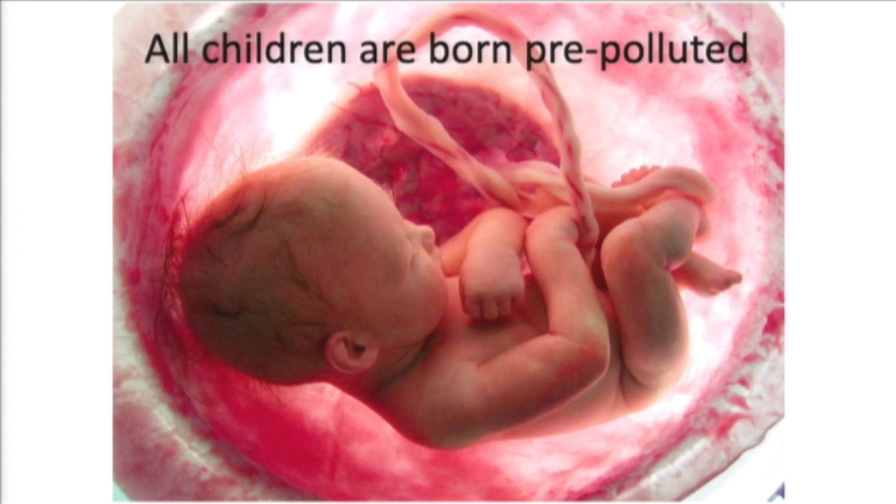And it was about 10 years ago that one of the first studies looking at children at the moment that they're born, looking in the blood found in the umbilical cord and looking at amniotic fluid, found that there are hundreds of chemicals that babies are swimming in the environment before they're born. Hundreds of chemicals.

When I first read that study, I think I was a graduate student or a postdoc, and I was getting ready to give a talk. I was talking about this to my husband, who's not a scientist.

He said to me, how many chemicals should be in the amniotic fluid before a baby's born? If you think about that for a second, it's not actually a question for a scientist. That's a question about our values, about our society. How many chemicals should there be in amniotic fluid?

How many things should we be exposing unborn children to against their consent? Usually, these are things the mother isn't even aware she's been exposed to, and she must have been exposed to them for them to get into the amniotic fluid.

Now, I don't want to confuse this concern about chemicals with a newfound language like chemophobia. This is not a phobia. And if it were a phobia, there's nothing you can do to get away from these chemicals. This is an issue of knowledge, consent, and a question about what these chemicals are actually doing if we're being exposed to them.

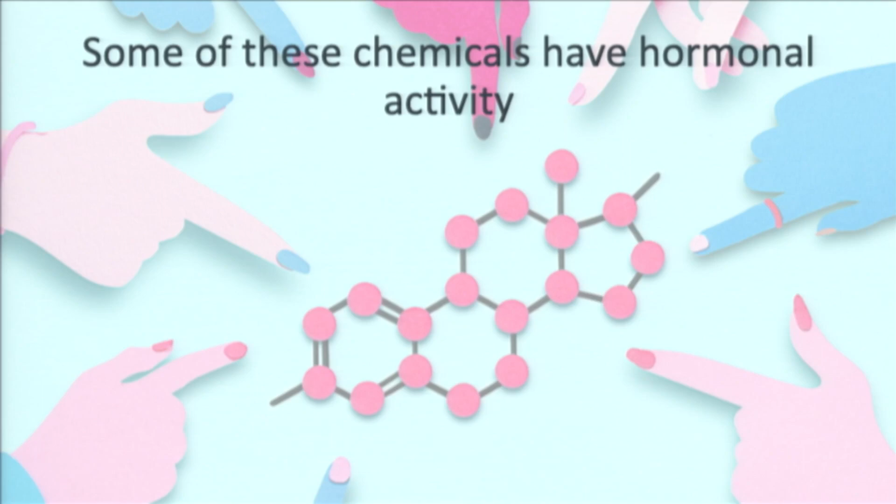I'm trained as an endocrinologist, and my interest in this topic is because some of these chemicals we're exposed to on an everyday basis have hormonal activity. Some mimic the hormones our bodies make naturally. Some block the ability of those hormones to do their job. This is concerning because at every stage of our life, virtually every aspect of the function of our body, our physiology, is coordinated by hormones, from conception until death.

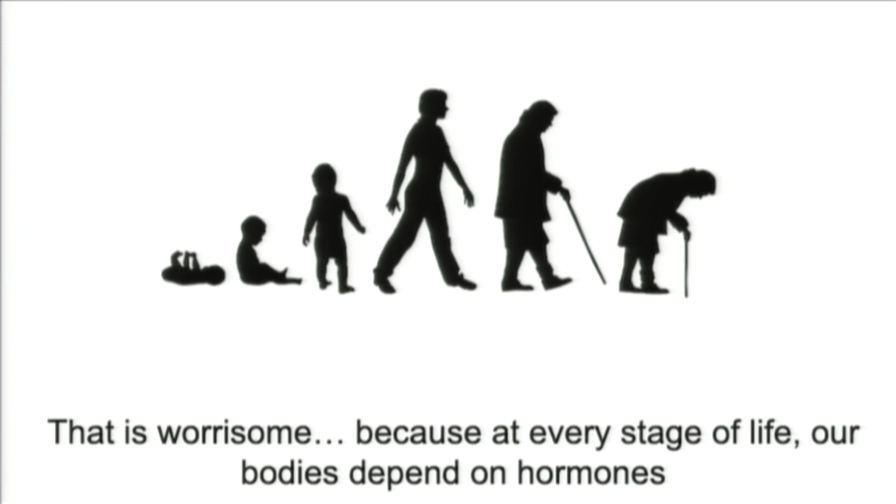The bagel you had for breakfast, its digestion is dependent on hormones. Your ability to keep your body warm sitting in this room is dependent on hormones. Your ability to maintain bone health so you can stand upright is dependent on hormones.

So it's not just the fun stuff that teenagers like to ask me about, because they do ask, but it's virtually everything, including the hormones responsible for brain development, for the development of your organs, for the choices cells make during development about whether they'll become fat or bone.

Our exposures to these chemicals occur in everyday lives, and they're typically low, which is why we don't notice them. It's not like I'm getting into my shower in the morning with a plastic shower curtain and dropping dead because of the plastics in that curtain. We're not talking about the kind of toxicity we should worry about when exposed to things out in the world. We don't want things that cause us to just drop dead.

And some of them, we even take some small satisfaction in. The idea of buying a non-stick pan to cook the perfect egg—who doesn't want that? When you come home from work at the end of the day and sit down on your sofa and it makes that lovely swoosh sound, that's what's releasing flame retardants from the foam of your sofa.

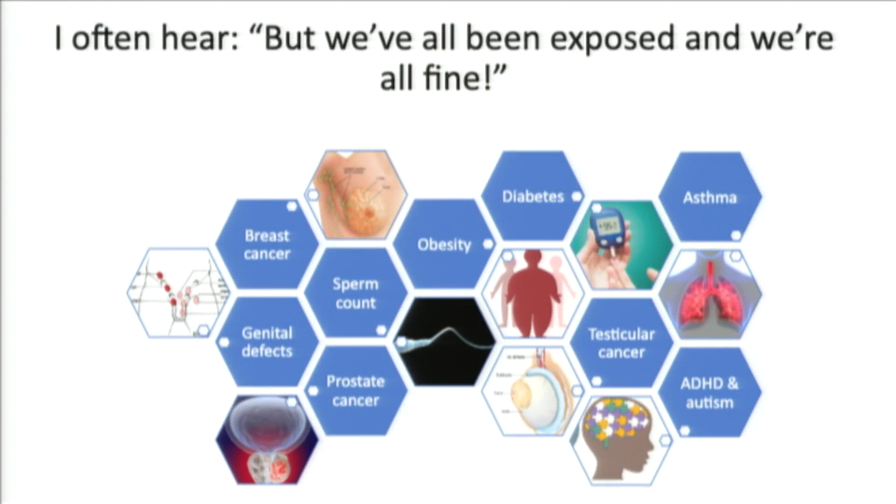So I often hear, we've all been exposed to these things and we're all fine, right? That comes along those lines of, you're just creating hysteria, this is chemophobia, you're trying to make people afraid of things. And what I would tell you is, we are not fine.

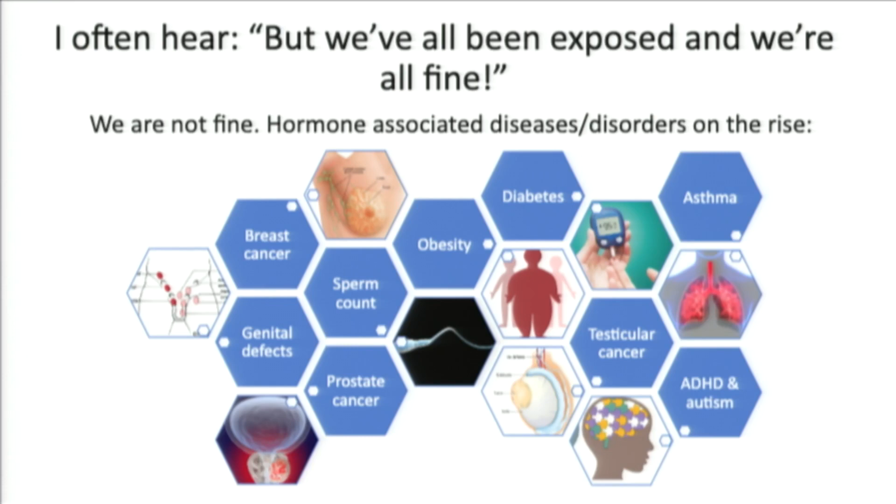As an endocrinologist, we've been studying the secular trends in conditions and diseases that affect human populations, and we see increases in those diseases. Increases in asthma, ADHD, breast cancer, testicular cancer, decline in sperm count, increase in infertility rates, increase not just in type 2 diabetes, which we think of as a lifestyle factor disease, but type 1 diabetes. Increases in obesity, increases in learning disabilities. Do I need to go on?

We are not fine. We are not okay. And the changes in the prevalence or incidence of these diseases have occurred over very short periods of time. When my grandmother was young, the risk of breast cancer was 1 in every 22 women. Today, the risk is 1 in 8. The difference between my grandmother's generation and mine cannot be explained by genetics. There aren't that many genetic changes in a human population over two generations.

So we must start looking more closely at what has happened in the human environment over those two generations. My work, and the work of many of my colleagues, comes from controlled studies in laboratory animals. No one enjoys killing mice and rats, but humans are generally non-compliant patients. If I said to half of you, for the rest of your life you're not allowed to touch anything plastic, not only could you not do that, but you would probably not be willing to try. It's hard to look at these relationships in humans, but that doesn't mean we can't do it.

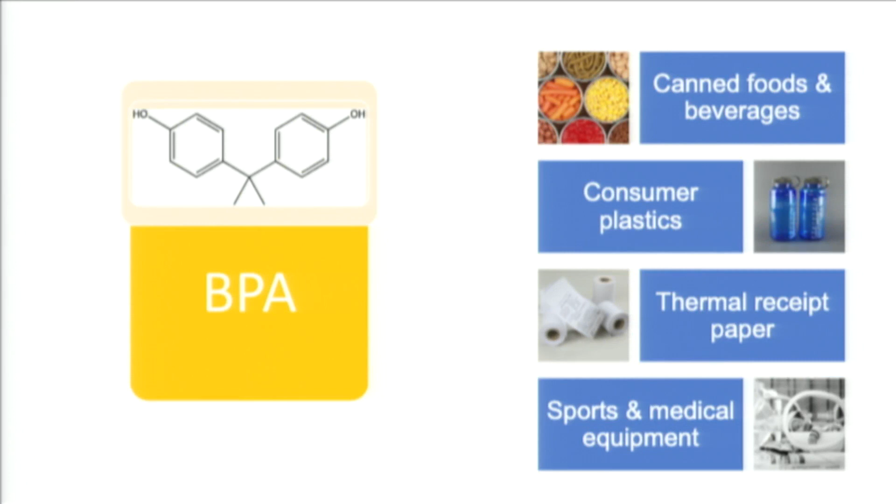The effects of BPA on hormone-related outcomes are extremely well documented, because just as it was pharmaceutically useful as an estrogen, it acts as an estrogen when it enters our body, even though it's entering from leaching plastic products, leaching epoxy resins, and rubbing off thermal papers. We know from animal studies, as well as fairly robust human studies, that exposure to low doses of BPA affects reproduction in males and females, affects development, health and disease of the mammary gland—the breast in women—affects metabolic endpoints including obesity, diabetes, and liver disease in rodents and humans, and affects brain and behavior, including some fairly robust studies done in children measuring what was in the mother's body during gestation and how the child behaves and acts.

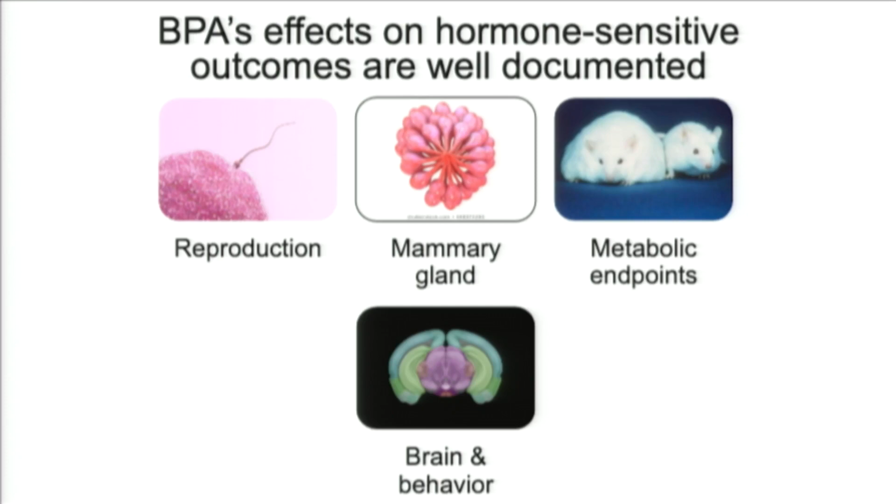Unfortunately, as hinted at with the thermal receipt story, BPA is just the tip of the iceberg. As we've started to phase BPA out of consumer products—and that's not because any regulatory agency has taken action, it's because consumers have said, wait a second, I don't want an estrogen in a baby bottle—instead we're replacing it with other bisphenols.

My lab has been studying bisphenol S, which is a major replacement for BPA. It's in baby bottles, consumer plastics, food can linings, and thermal paper—all the same things. When the first study was published showing that BPS, like BPA, is an estrogen, a reporter called me and said, Laura, I am not a chemist, but wouldn't you think something called bisphenol S would act like something called bisphenol A? And I said, Brian, I am not a chemist, but yes.

When I'm asked to talk about endocrine-disrupting chemicals with the general public, I'm often asked, who is supposed to protect us from these chemicals? Isn't it someone's job to say that's an endocrine disruptor? It affects hormones in babies. It will affect the development of babies because that's what hormones do. So let's not expose children or babies or pregnant women or the elderly or you to these chemicals.

In the US, chemicals are regulated by the EPA, which regulates pesticides and industrial chemicals, including pretty much everything that goes into building materials. It regulates what's found in the air and water as a pollutant. The FDA regulates cosmetics, personal care products, pharmaceuticals, and food packaging.

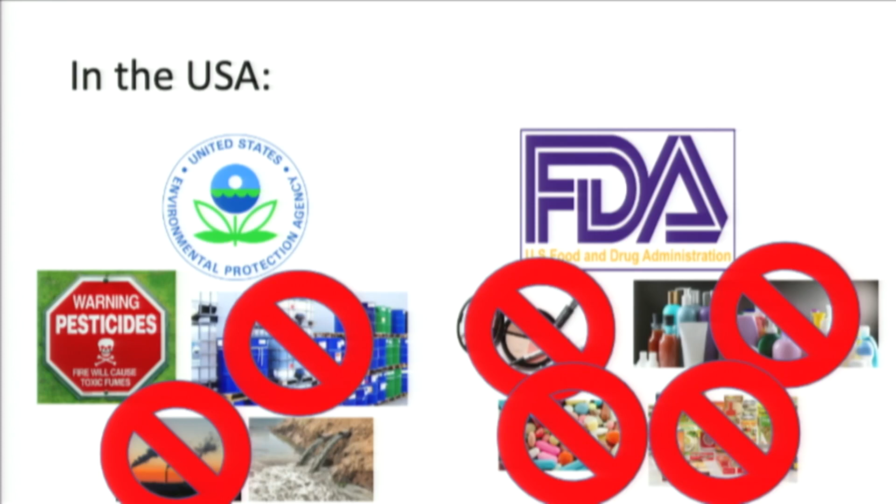Currently, we only have legal statutes related to endocrine disruptors for pesticides. The statute requires that pesticides be evaluated only if they have estrogenic activity, so forget about all the other hormones. To date, the EPA has evaluated with any level of detail only 52 pesticides for endocrine disrupting properties.

There are thousands. I just want to make sure we understand the real cost, because the EPA, for all its strengths and weaknesses, requires in its regulatory statute that it consider the economic cost of any regulation passed. This is why even a product as dangerous as asbestos took almost a full decade to regulate in the United States, because the asbestos industry could argue that it cost them something to be regulated.

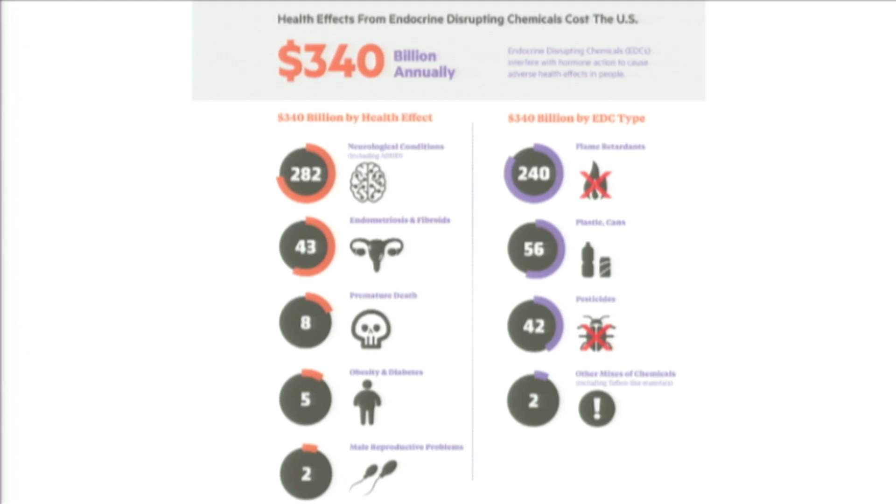There is a cost to not regulating as well, and that is not usually evaluated by decision makers or regulators. Instead, it's starting to be evaluated by academics like my colleagues at NYU, who looked at just a handful of endocrine disrupting chemicals and just a handful of diseases, and calculated costs to the American public annually of over $300 billion.

So what do we do when regulations fail to protect public health? What can you do? I think the first thing we need to do is acknowledge a need for a paradigm shift. In a paradigm shift, the first thing that happens is you deny there's a problem. The second thing you do is say, okay, it's a problem, but it's extremely rare—like, maybe BPA is bad, but otherwise you're just making a big deal about other things.

The third thing you do is suggest an inability to do anything about the problem. You say, okay, it might be a widespread problem, but it would cost us way too much to do something about this, so we can't.

The next thing you do is accept that there's a problem, and we're not there yet. We just heard about how people don't accept that there's a climate crisis right now. In the world that I work in, there's a large lack of acceptance that there's a problem, which means we can't get to the last step, the most important step.

Which is to accept that there's a problem and enforce a change. The second thing we need to do is learn to identify manufactured doubt. I could give you an hour-long lecture on this—it's one of my favorite things to talk about because it's the elephant in the room: there are vested interests in preventing change.

The tobacco industry wrote a literal playbook of how they could manufacture doubt about the harmful effects of their product. This happens over and over and over again—see the asbestos industry as an example.

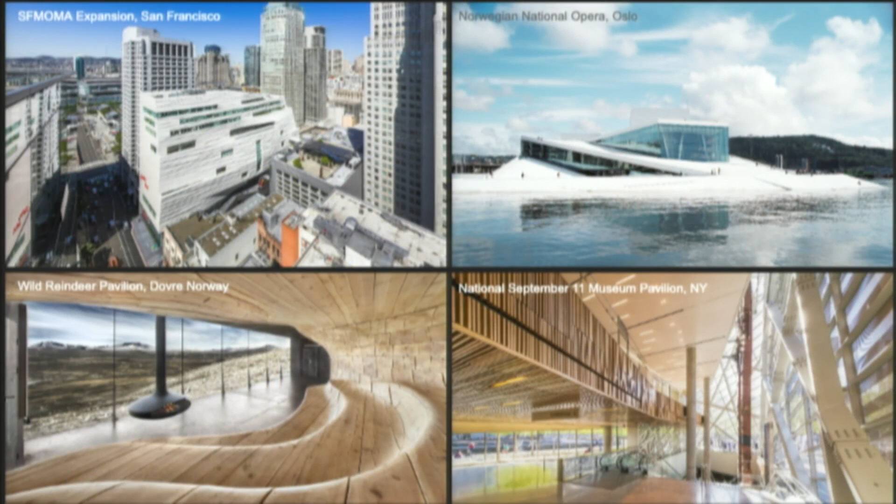Some of the projects that we have become well known for over time are some of the bigger projects around the world: San Francisco MoMA expansion, which I had the good fortune to work on, completed in 2016; the Oslo Opera House, completed in 2008; and National September 11th Memorial Museum Pavilion, the little building that's on top of the memorial. That's actually the project that brought us to New York in the first place. These are all projects that we feel proud of, that give us a chance to have an outreach that's global.

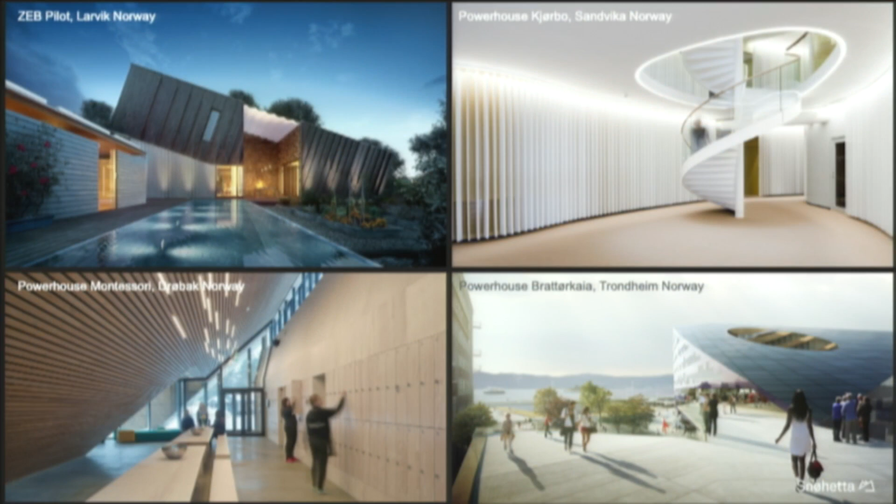However, this other body of projects that we call our Powerhouse Projects - essentially what they are is different research initiatives into zero emission buildings. And while I won't specifically talk about all of the issues that come with zero emission buildings, the principle of them is really that you take your emissions reduction through whatever phases of the project you've intended to address, whether it's in the building phase, the operations phase, the construction phase, or the deconstruction phase. You try to reduce your carbon footprint to zero or positive, which essentially means that your energy production has overcompensated for all the energy that went into the products that you built with.

So some of these are our projects that have been kind of pioneering those things in our practice and in the world. And so we began this effort in our Norwegian office first. It's probably not a big surprise that you can really start to be more progressive in an environment like that, where there is a more unified acceptance of these kind of practices. What's important to us is that we can find ways to adapt this thinking elsewhere in the world.

So we were presented with a really interesting problem a few years ago, and approached by the Center for Green Buildings and Cities at Harvard University. They're a part of the GSD, but they operate fairly independently as a kind of a think tank for green building practices.

The intent was to get this house to be at or near zero in terms of the energy required to run it for heating, cooling, and electrical needs; to have zero mechanical ventilation, in other words 100% natural ventilation; and zero electric lighting needed—what we explain as 100% daylight autonomy, making sure you can run the house with zero lights on as long as the day has some daylight and it's not too cloudy.

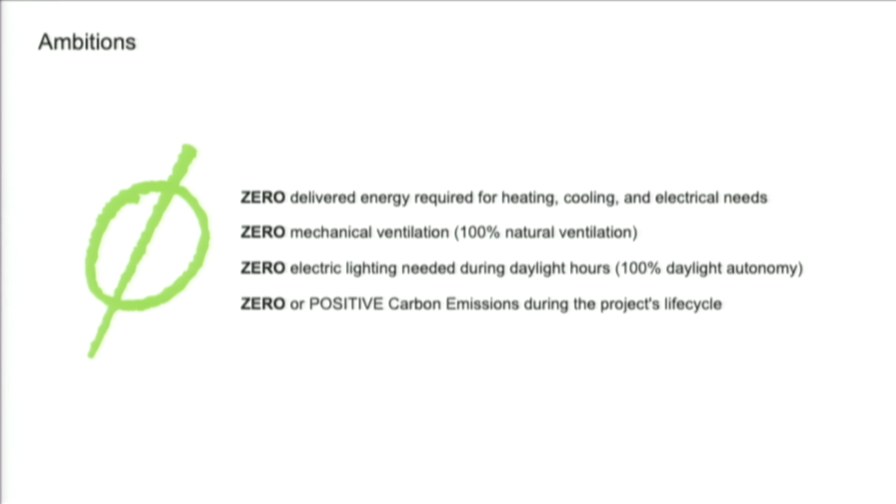And zero or positive carbon emissions. I could talk about any one of those things in a lot of detail, and I will focus on the air aspect of this, but I'll probably touch a little bit on all the other aspects as well.

This was a diagram that the Center for Green Buildings and Cities created since the project. It talks about the differences between a standard building, a standard house, and what this house is trying to achieve.

It doesn't have zero systems, but essentially has very few. It's not a totally passive house—it requires a certain amount of energy to run on, but that energy is extremely minimized. Essentially, what it does is it's constantly measuring itself.

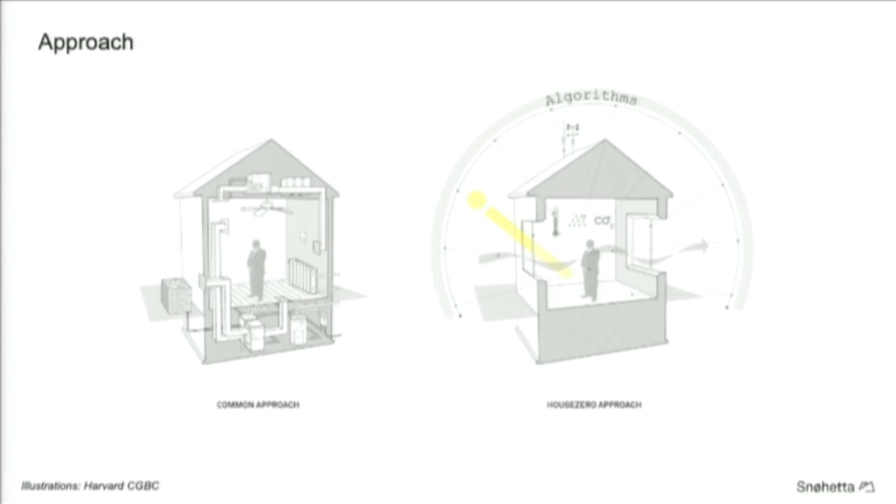The house is embedded with hundreds of sensors, in the exterior materials, on the surface, inside the walls, at different heights. They monitor everything from air pressure to temperature to carbon dioxide to air velocity at different points in the house where air moves in and out. This sensoring, and the weather station, etc., essentially helps run the house.

These things really become the systems of the house. So you go from a place where you have lots of piping and ducting and those kinds of systems, to a house that really runs on wiring. We have construction photos with these bundles of wires essentially required—not necessarily to run the house, but this house is meant as a lab.

So what they want to do is make sure they can monitor the way the house was designed and see if it's performing to its aspirations.

As we looked at the issue, we were also looking at the context of how buildings respond to their environments. In a similar environment, as an average, a house's energy use per square meter is really the only way you can create apples-to-apples comparisons for things of different sizes and types. An average house might use 232 kilowatt hours per meter squared per year—a rough average in this climate.

A passive house is a really aggressive way to look at energy use reduction, though it doesn't address zero carbon—that's a different issue, and a passive house has its own challenges with respect to that. But in terms of minimizing energy use, it does a really good job; a passive house can cut the typical energy use in half or better.

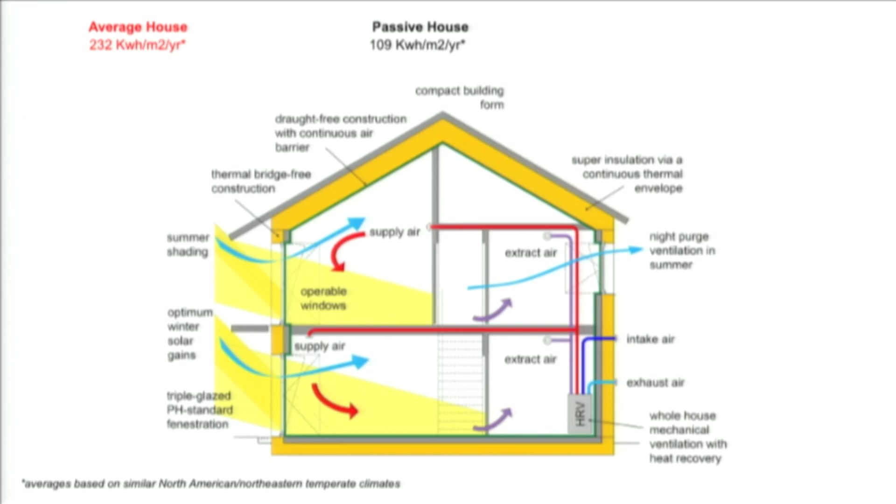The goal of our project was to cut that down even more, to an aggressive goal of somewhere between one-eighth and one-tenth of the energy use per square meter of an average house. This was an early study, an early rendering we did. It includes both the house, which you see in the background, and an expansion in the rear yard—that's where this view is taken from.

Phase one of the project, which I can talk about today, is the work we did on the house. As I said, the house is not without systems, but the systems are radically minimized and balanced against a lot of other passive techniques in order to make this house run at those extremely low energies.

One of the critical aspects of zero emission building is to radically reduce energy use. That sounds obvious, but it's different from North American zero energy building, which doesn't incentivize lowering energy use—it incentivizes replacing your energy use with other sustainable practices like renewable energies that you can put on site, off site, or pay energy providers for offsets.

In a Norwegian zero emission building project, you can't do that. You actually have to work within your footprint, which naturally limits and incentivizes you to keep your energy use extremely low. Some of the systems we have—natural ventilation systems run through the windows, obviously, but there's also a solar vent that drives natural buoyancy.

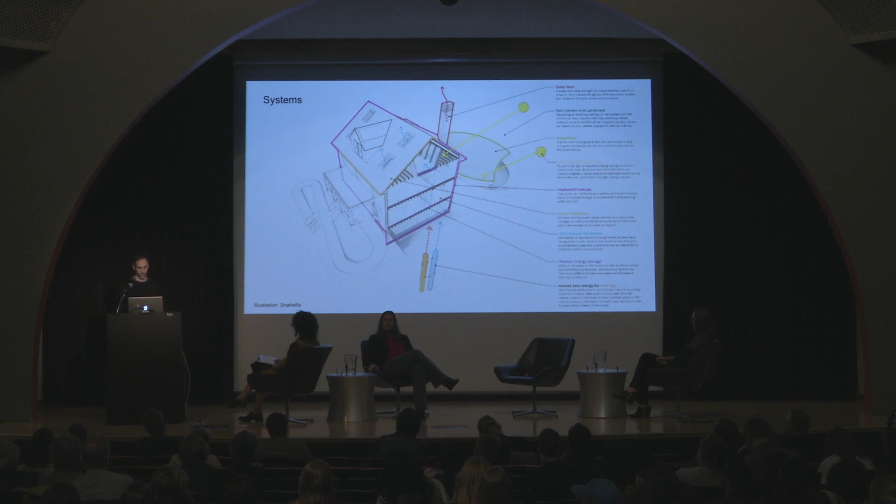The windows and skylights each have an automated and a manual portion. The automated portion runs off a Danish motor that sits inside the window, tied back to a CPU in the house that runs all the systems together. So the windows are constantly opening and closing, even in winter when they have to do air replacement at night.

There are other systems in phase one of the project, like improved envelopes—I'll talk about that in a minute. We had to get our air tightness and insulation up to a certain level to achieve these goals, but we couldn't take our insulation too far in order to maintain a zero carbon balance. We also had to be careful about the materials we used.

Power production on the roof is critical for offsetting energy, so that's something we studied many versions of, from customized products on the roof to standardized ones.

Thermal energy storage was a big deal. We had to add a lot of mass to the house to make sure the thermal inertia was slowed down to the point where the house could respond during the seasons and act primarily passively most of the year, except during the extremes of deep winter and deep summer.

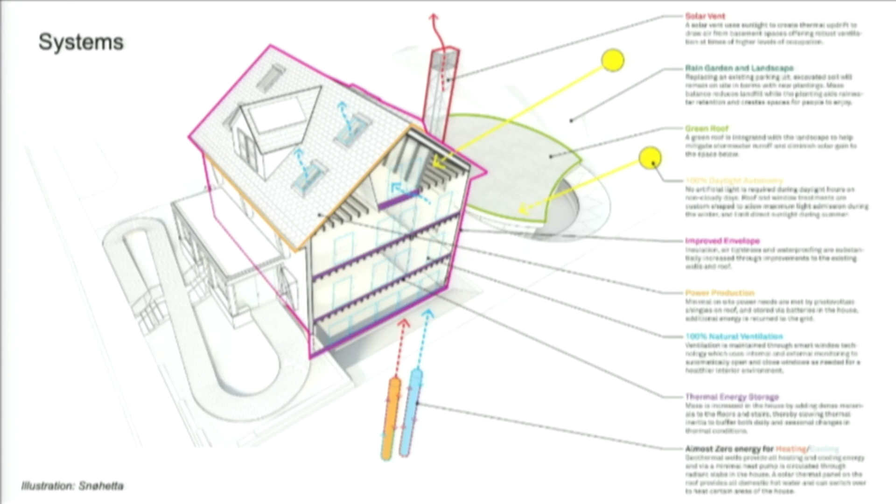And then almost zero energy use. We do use some geothermal wells that provide ground thermal coupling—we have a heat pump that runs the water that comes from 400 feet below the ground, but it's not artificially heated or cooled in any other way. That runs through the slabs, which we added to the wood floors to add mass to the house.

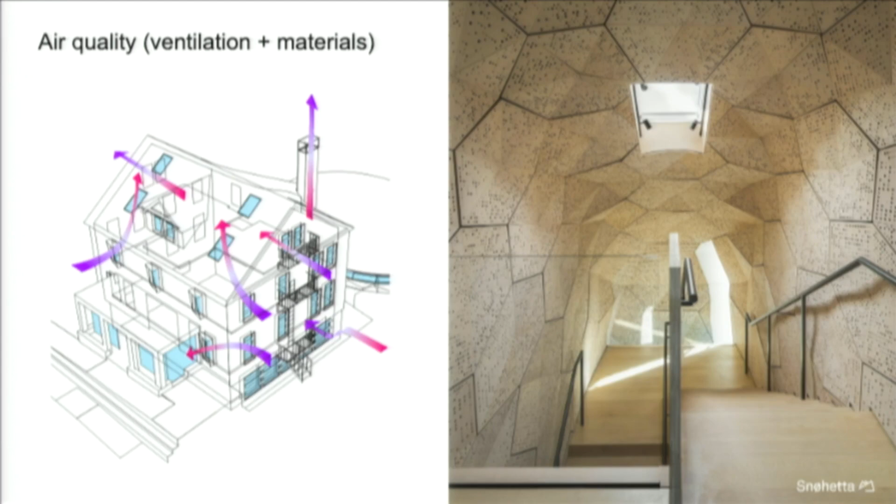In the context of this talk, however, air quality and material use is primary. The two aspects most critical to air quality of a project like this are how you ventilate and what materials you choose and where you put them. That's primarily, I think, the way I can address this issue here.

The ventilation systems in the house—there are really two primary ones, as I mentioned, but there's the typical window system. We used an unbelievably energy efficient window from Germany, and had to couple it with the Danish company we work with to fit all the systems into the window. The top light of the window is the automated light, and the bottom one is manual.

You can, of course, throw off the balance of the house if you're using the manual windows incorrectly, but there are essentially alarms that go off when that happens, allowing people to understand how to use them better.

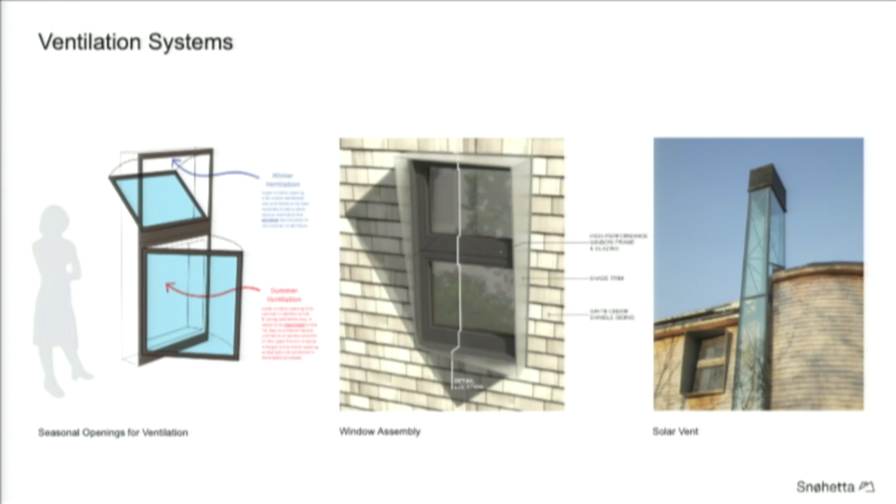And also the automated windows can try to adjust for any user error. And then there's the solar vent in the back, which actually is more there to drive the higher occupancy spaces in the basement of the house.

How we tested this, how we proved it out is one of the ways that these kinds of projects differ from our normal projects. We do a lot of simulations in the concept phase, a lot of CFD modeling. The beauty of this project was that we were working with an initiative, a group of PhDs that do this all the time.

So they were essentially part of our design team in this early phase. So these simulations, external CFDs, internal CFDs, to make sure that window placement, where the manual windows go, how far they can open, how much you can disrupt the internal temperature in different parts of the season, how that air gets distributed around the house or in a single room, all of that was proved out in the concept phase.

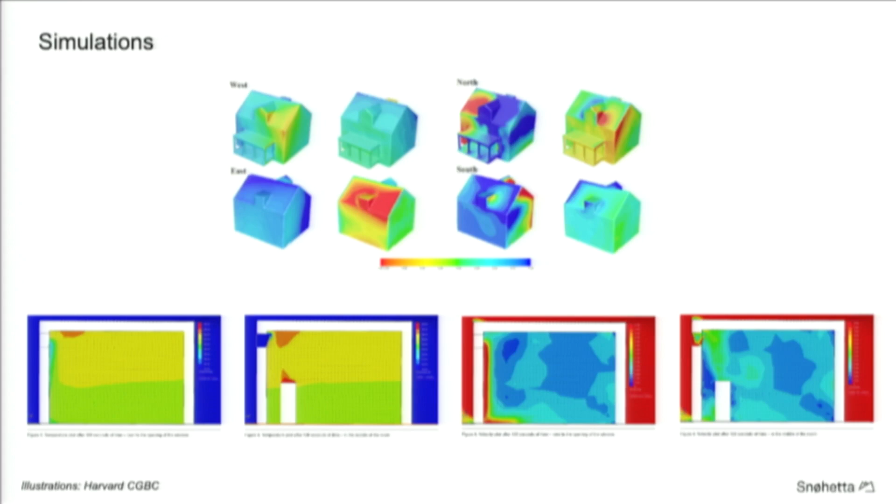And then what we were able to do from that, after we could quantify that a little bit, is to start to put some best practice into place. And so one of the things that we discussed before we came to this talk was how I could, in a very short amount of time, frame a discussion that maybe can make a difference to people's practices. So I think of a couple of ways that I could do that.

And they really center around your material use and your ventilation practices. How can we find some shortcuts to make sure that everyone can do some of these things and do them well? In this house, what we followed was the Redline Principle.

Which might throw you off a little bit because there's nothing red on that slide, but it's the principle that you have a boundary that you don't break. In Norwegian practice, they use that term a lot, the Redline Principle, where you basically draw that red line around your plans, around your sections, around your details, and make sure that is unbreachable. And that red line can mean different things.

So in this case, I've drawn a blue line, which indicates where the vapor barrier is in the section and in the detail. And then there's also, of course, a weather barrier. But in some constructions they are the same, and in some they are different. This is a little bit more of a rain screen type cavity in the wood construction. It's more of a Norwegian way to build.

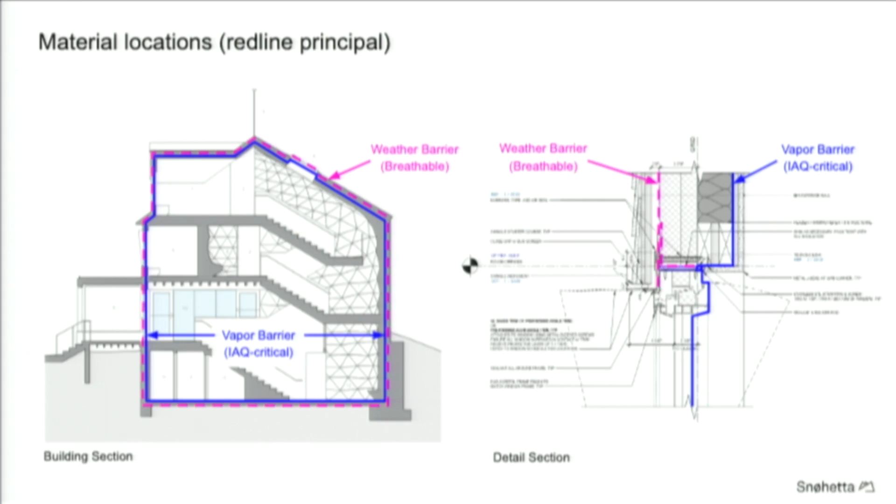But what it does is the blue line is critical. So anything inside of that line, any material inside of that line, you have to be hyper in control of in terms of the interior air quality. Anything outside of that line, you want to be careful of as well in terms of a holistic project, but it's not going to affect the indoor air quality nearly as much.

The other interesting way to approach shortcuts is to think about some of the certifications that we all know about. Some of these you may know about, some of these you may not use day to day, but these kinds of shortcuts were really helpful to us because we had to do a deep dive in terms of materials. Every project you do a certain amount of that, but on these projects you have to do it.

You have to go quite a bit deeper, not just in the detailing and design phase, but also in the construction phase, because as the designers and architects in the room probably know, the moment you get into construction, everything goes out the window, and contractors start asking you to switch out everything that you started with. And so you have to figure out a way to respond on your toes to kind of keep the goals in mind.

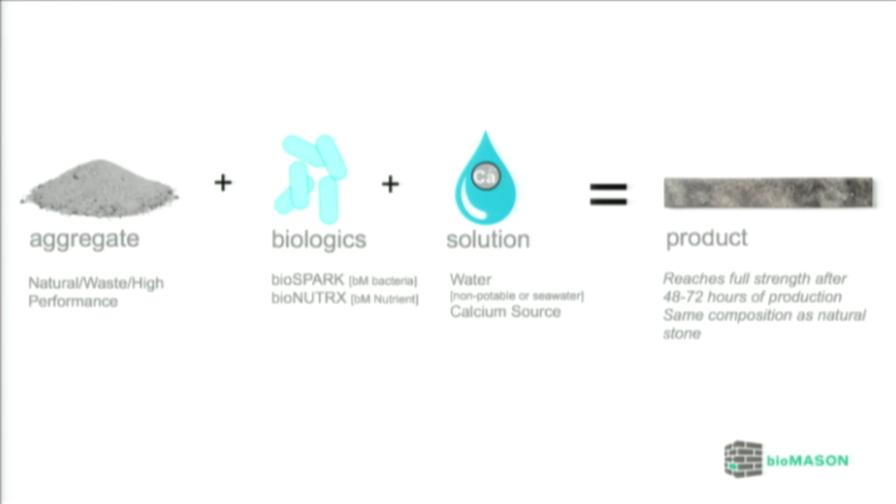So I've learned in different mining entities that you have a lot of fines. Even in construction demolition, you have a lot of fine aggregate materials that it's very difficult to make anything with, because ASTM has standards for the size fractions that you can use for concrete versus asphalt. And what we use is actually something well below those sizes. We use something that's called wash screenings or fines.

They're really beautiful. So what we do is we take those aggregates and we mix them with our biologics, which, what's great about starting companies, you can name stuff. So we named it BioSpark and bioNUTRX. BioSpark is the organism which activates the process, and the nutrient is actually what gives the metabolism to the organism so that they can continue to produce that pH shift.

With that, we add a solution, which we use water as a carrier. It's a nice highway for us to deliver the nutrients and calcium source to the organism. And then between 48 and 72 hours, depending on what strength you're after, you have a final product. It's interesting because the scale of this production honestly looks like hydroponics, but mixed with traditional equipment that you would find at a typical concrete block plant.

So one thing that we knew early on was we didn't want to invent something where everyone had to wear a lab coat to be able to make this product. We wanted something that really could slip into existing manufacturing.

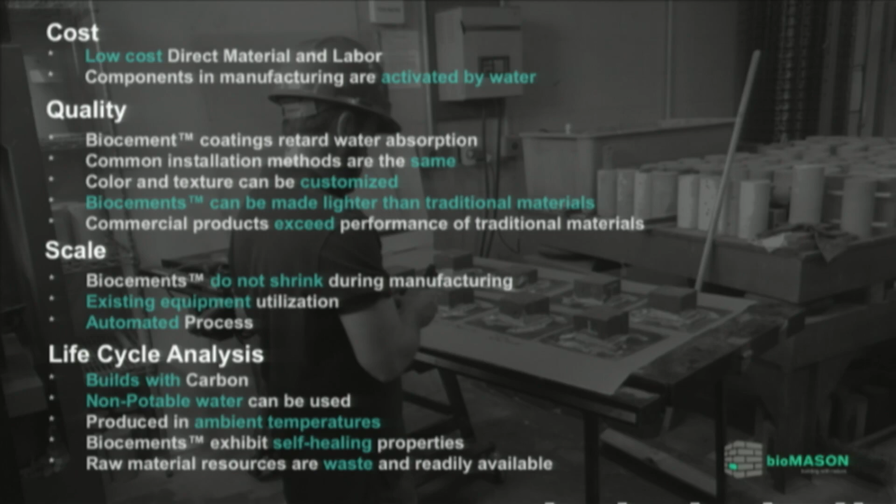They don't shrink during manufacturing, so what we press out is actually the size that it grows to. And I already mentioned we use existing equipment and it's an automated process. But on the life cycle analysis part, what's really important to note is that all this is done at ambient temperatures. We're not using heat, we're using human comfort as our temperature range.

Non-potable water can be used. There's actually, in some cases, advantages of using non-potable water with biological systems, because there are a lot of goodies that are still in the non-potable water for the organisms.

Here's something exciting: we learned that it exhibits self-healing properties. That was a crazy day. We had a unit that was growing in the process, and we pulled it out and accidentally dropped it. It wasn't ready yet, so it basically just cracked in half. So we said, let's put it back in. And it grew back together. It was very exciting. We've actually taken that and looked at other different applications, some really fascinating ones, like cements that grow underwater that never die. They self-heal, and they just use what they're extracting from the natural environment.

All right, so right now what we're doing is we're building plants. That's very exciting. I love scale. I want this to be in every country around the world.

So what this is an image of is really part of our production process itself. Again, it's very similar to how concrete masonry is already made today. We grow it in a vertical system. Right now we have a product that we call BioLith. I have a small sample board outside here, and then I have one in my bag called my purse brick. If you want to come look at it.

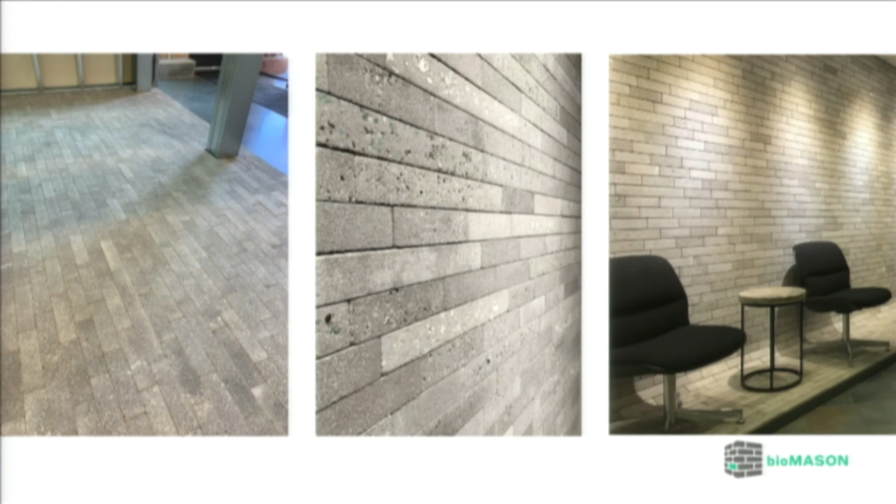What's crazy to me is that we waited 5 years before we polished it with a polisher. I guess I thought, no one polishes bricks, why would we do that? And then we realized, wow, the product itself is a natural stone — all we're doing is growing natural sandstone. It's sand and calcium carbonate, or aggregate and calcium carbonate around it. So we have different finishes that we can do. We can also add different materials on top, broadcast, looking at different aesthetics, but also even adding different performance additives as well.

We actually started — one of our first projects was in San Francisco at Dropbox's headquarters, for an order of pavers. It's a funny story because this was years ago. It's been installed for about 4 years now, and it looks great. But when it was just 3 of us in the lab, we got a phone call from William McDonough Partners, one of their firm leads, and they said, we'd like to place an order. I said, can you tell us a little bit about the project, the timeline, and the quantity? It turned out they wanted the entire building, which we loved, but we were just getting started. So I talked them into 2 small courtyards, and that was really important for us to just jump into scale. There's nothing like having to figure out scale when you have an order due in 3 months. It was great.

So one of the things that's important to us is transparency. I'm trained as an architect, so I understand the importance and the need for transparency and education in terms of what that means.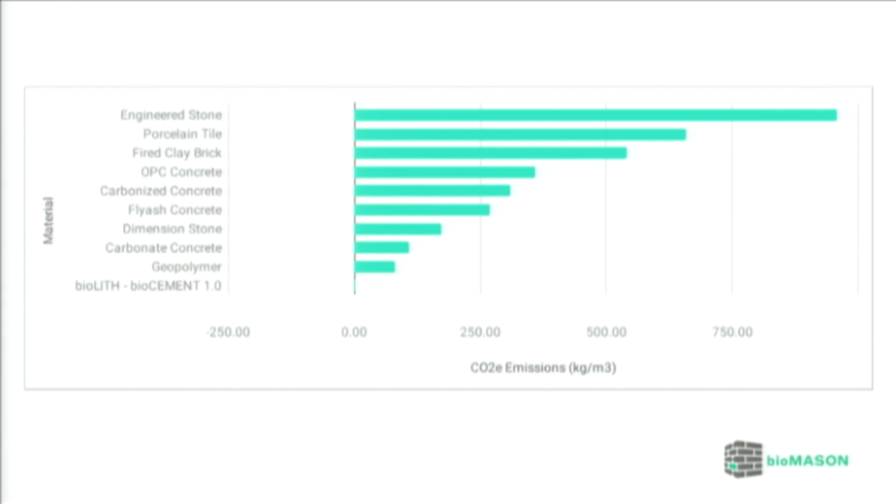So this is just a snapshot of how to compare the different levels of CO2 that happen from different materials. There are governing things.

There's mention before of different certifications, there's so many of them. For us, honestly, a lot of times we go through a lot of different cycles of what's important for us to be able to communicate, since we're quite open about what it is that we do—we have nothing to hide. So we are certified through Cradle to Cradle. There's a lot of different aspects like Declare, LEED, and EPDs. We're constantly doing work to keep those different groups up to date.

But one thing I love about Declare is the way they frame it—it's the building nutrition label for construction materials. What a great way to think about really being able to analyze a construction material, the same way we analyze food labels.

There's a lot of teeny tiny text here, but essentially, if we're just looking at LEED, there are some aspects that really help us. Something I didn't talk too much about is that we use recycled aggregates—aggregates that are considered waste. So there are different points associated with that. You can use the product in existing buildings; you don't have to have a different way of installing it. It actually uses the same installation methods and the same materials. Although we will invent mortar next, I promise.

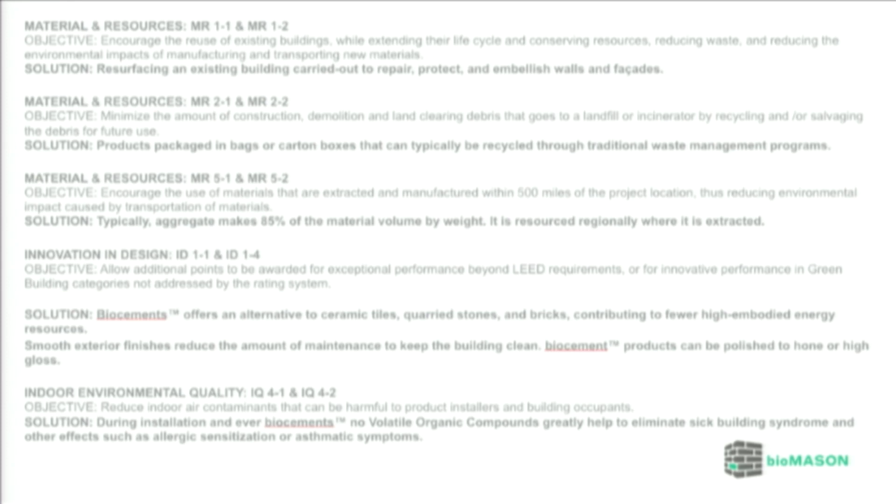Other things—I mentioned before about the finishing aspect. We're not using a chemical or a wax or anything to cover the product to make the sheen on it. We actually just polish it like you would a granite countertop. And then for indoor air quality, there aren't any VOCs—I mean, it's just limestone, essentially. That's again very important for us in being able to communicate that.

So I hope to leave you all inspired that just because you're trained in architecture doesn't mean you can't learn and build all of these different things. I think we need a lot more thinking about organisms. Personally, I love them—we only know 1/1000th of a percent of all the microorganisms in the world, and as mentioned earlier in the kickoff, Maya, we're losing them. So anyway, I hope to leave you inspired today. Thank you.